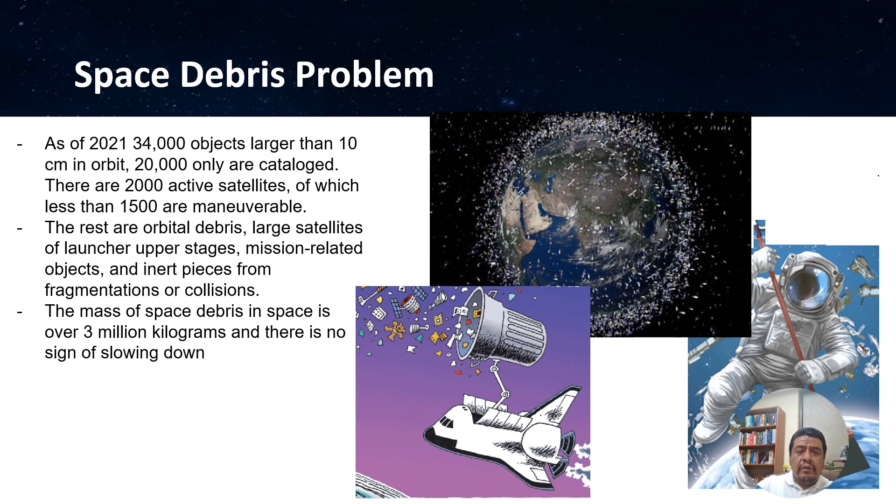This problem might produce collisions at hypervelocities. Therefore, there is a need for objects to be identified, captured, towed to a different orbit, to be reactivated or repaired if possible.

Here I introduce two examples of satellites that burned through all their fuel. After 9 years in deep space collecting data that indicated that our sky is filled with billions of hidden planets, more planets even than stars, NASA's Kepler Space Telescope ran out of fuel. The fuel was needed to continue further mission operations. Therefore, NASA decided to retire the spacecraft within its current safe orbit, away from Earth. In this case, it would have been very useful to be able to refuel the spacecraft and prolong its life. But with the current technology, it was not possible.

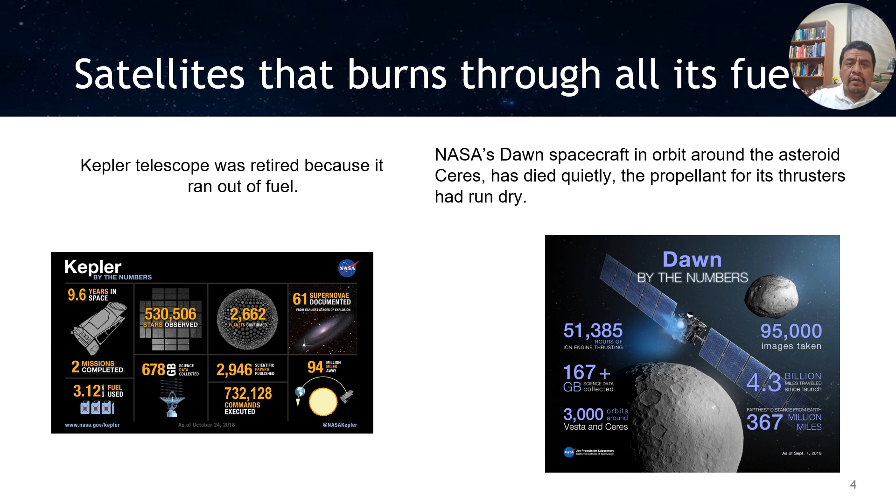Besides, after 11 years of operation in space, in 2018, NASA decided to retire the Dawn spacecraft for a similar reason. Presumably, the thrusters ran out of fuel, which prevented the spacecraft from establishing contact with Earth, as the antennas couldn't be oriented towards the Earth, and the power generating solar panels couldn't be oriented towards the sun. These are two examples that show the need for on-orbit servicing, on-orbit repair, on-orbit refueling. In order to reduce the amount of space debris, some of the malfunctioning or retired spacecraft should be captured to repair them or refuel them.

For this purpose, different techniques have been proposed. For instance, the use of mechanisms with tentacles inspired by octopus and spiders. But one of the most promising technologies includes the use of robotic arms to capture the pieces of space debris. That means a robotic arm mounted on a base satellite. In this regard, different missions have been proposed to achieve the goal of capturing a malfunctioning object in orbit, such as the Orbital Express mission and the DEOS mission.

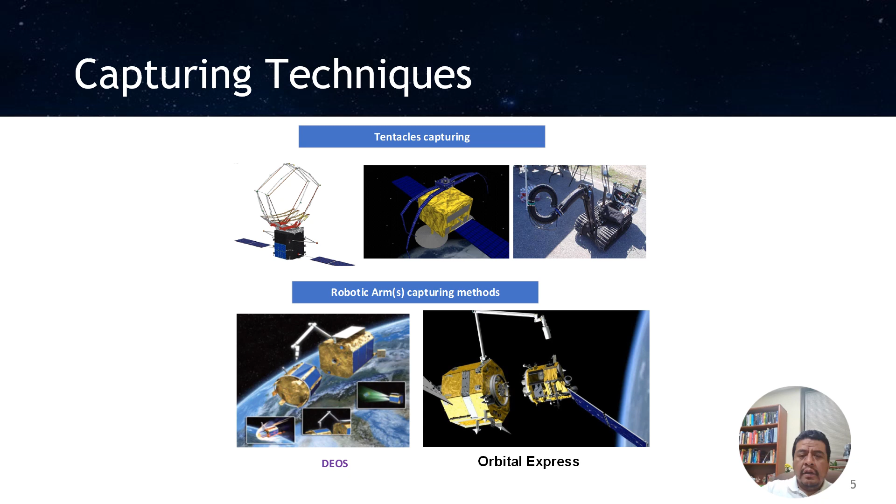The second phase is a final approaching phase where some areas of interest include soft capturing, the minimization of the disturbances on the base spacecraft due to the robotic arm motion, some safety considerations, and of course, robotic path planning and collision avoidance.

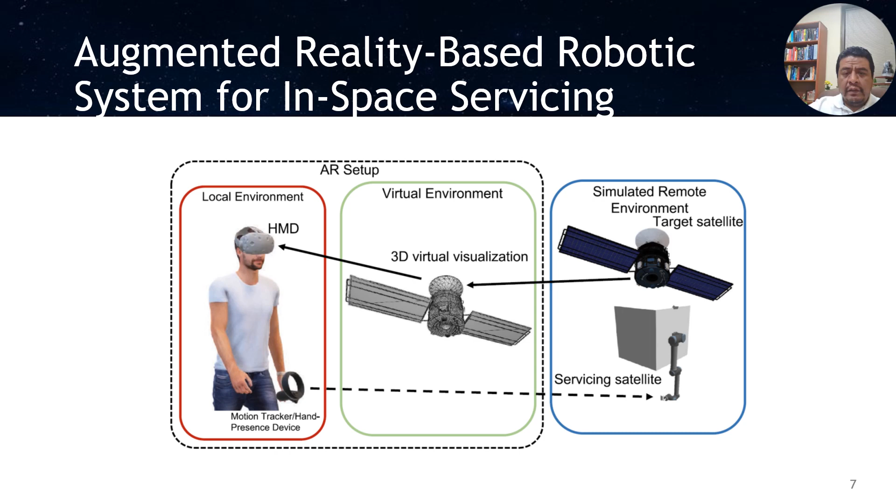This slide shows with more detail the simulated remote environment, which includes the servicing robot that features a base spacecraft and a 6 degrees of freedom robotic arm, which will perform a repair task of a solar panel.

A solar panel might be damaged during launch due to the high vibration loads or due to electric discharges in orbit, for instance. So, in this example, the robot should deposit a conductive ink to repair probably an open circuit or so.

In the augmented local environment, we have the human operator and we have the spacecraft simulated system. The human operator will use the model, the virtual model, to recreate the trajectory that the robot should follow for the repair task.

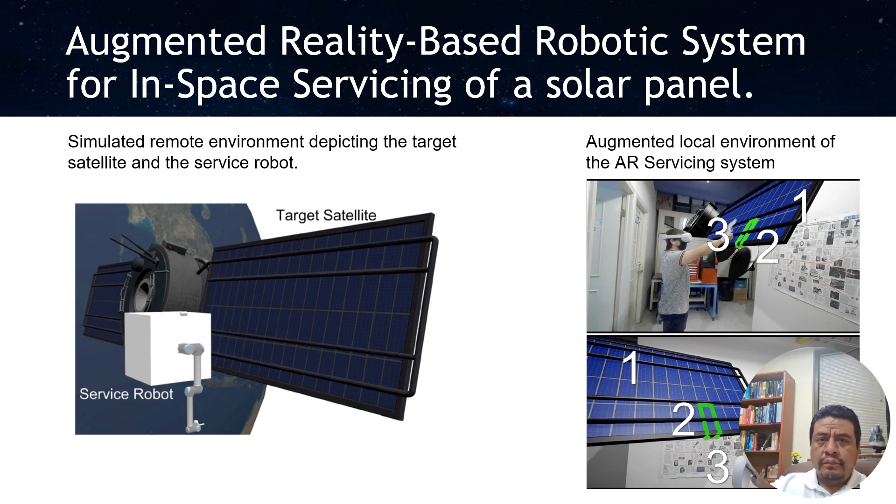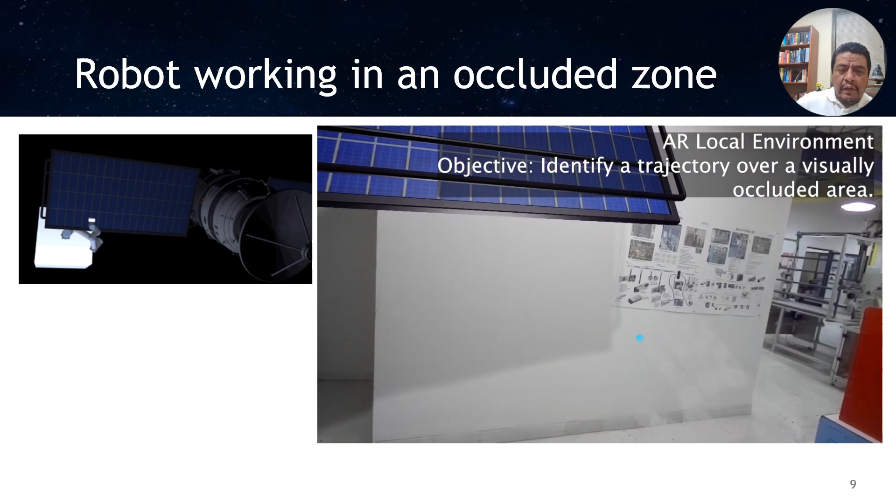As we can see here in this figure, the robot has to perform the repair task in an area that is not only difficult to reach but difficult to see. I'm gonna play the video that explains how this maneuver is performed.

In-space manufacturing and assembly also has potential to reduce space debris. For example, we can manufacture tools and components in orbit to repair and replace parts. Then we can also use space robots to install, assemble, or replace those broken components. And it will also increase the flexibility in the repair tasks.

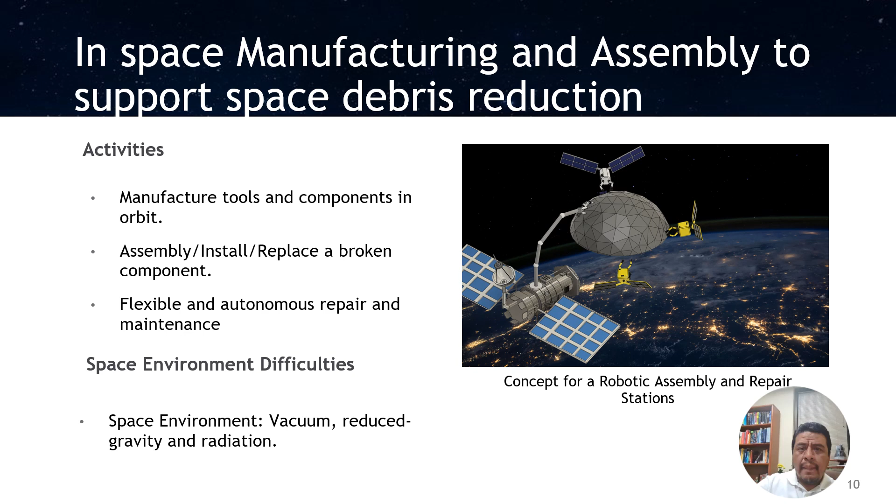A project related to in-space manufacturing and assembly we are working on is related to space welding. However, before performing the welding process, we first need to perform the joint fit-up of two components, in this case, two triangular parts as an example.

So we have a system with a 6 degrees of freedom robotic arm and a 2 degrees of freedom free-flyer small robot. They both have to coordinate to perform the joint fit-up of these two components.

The system includes a set of cameras to monitor the process and make sure that we achieve the required precision and process control. In this case, we have to make sure that the gap and mismatch of the two components are according to the requirements.

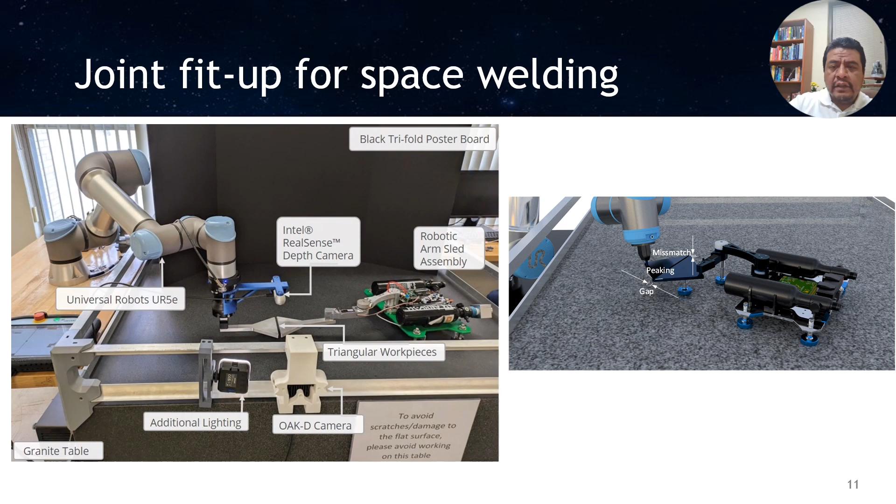Here, I'm going to show a video that illustrates how the two robots move to perform the joint fit-up of these two triangular parts, and we will be able to see also the response of the vision system to ensure process control.

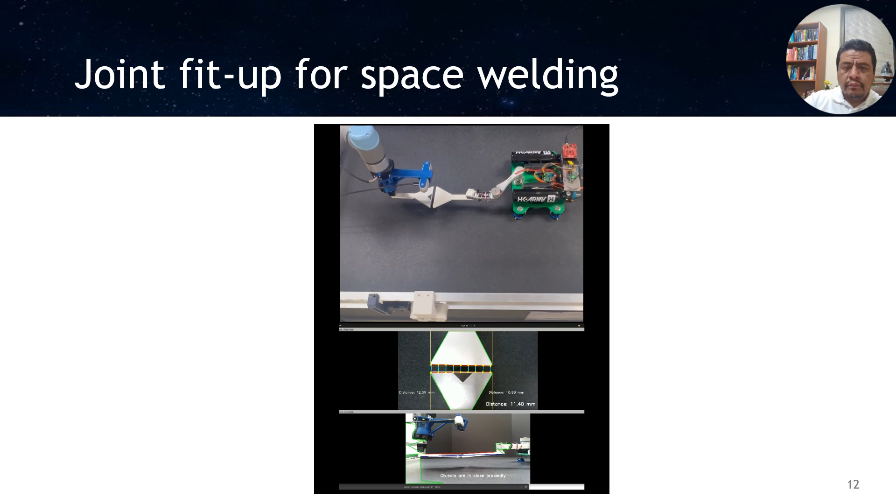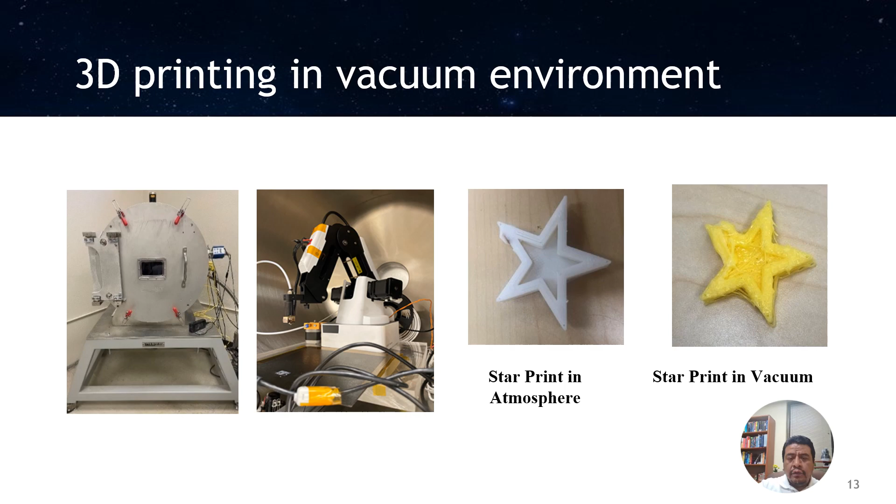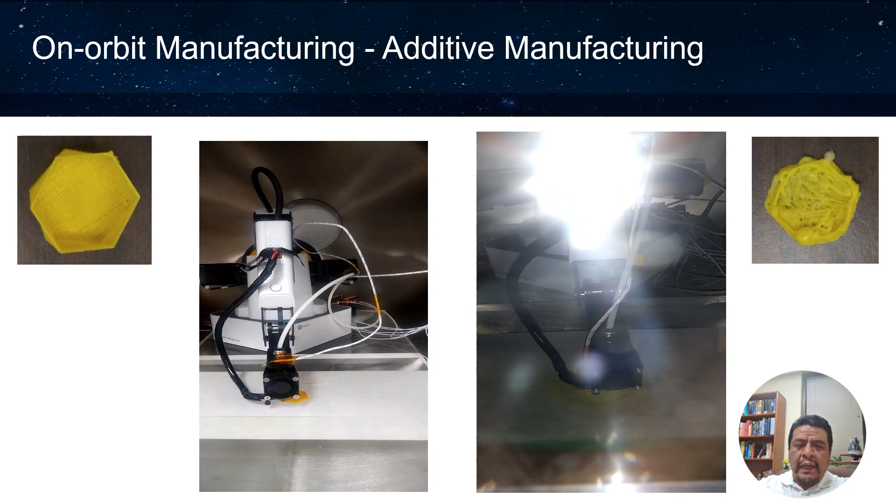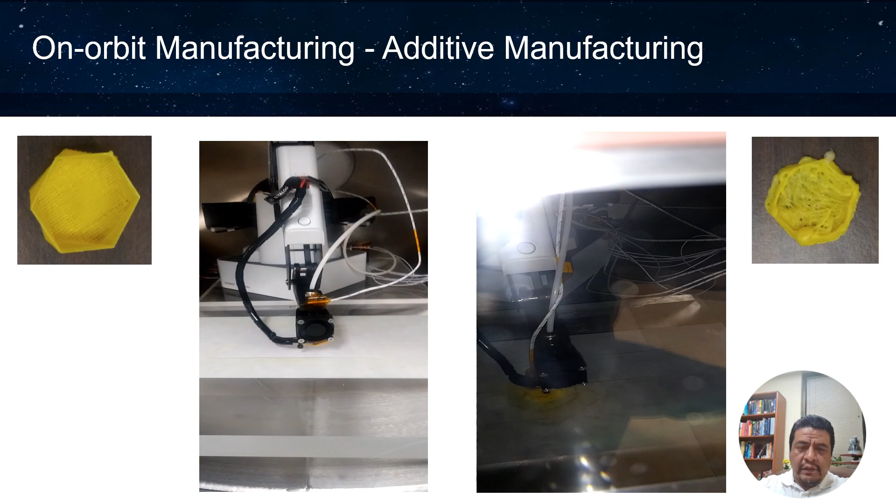Of course, the one printed in vacuum has some defects due to the lack of convection and due to the outgassing. This slide shows the video of the robots performing the 3D printing of the two same parts in regular atmosphere on the left and in vacuum on the right.

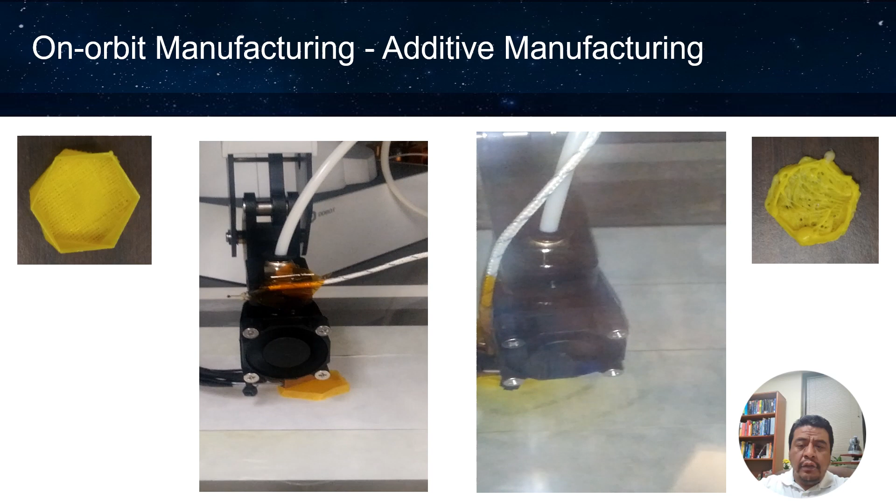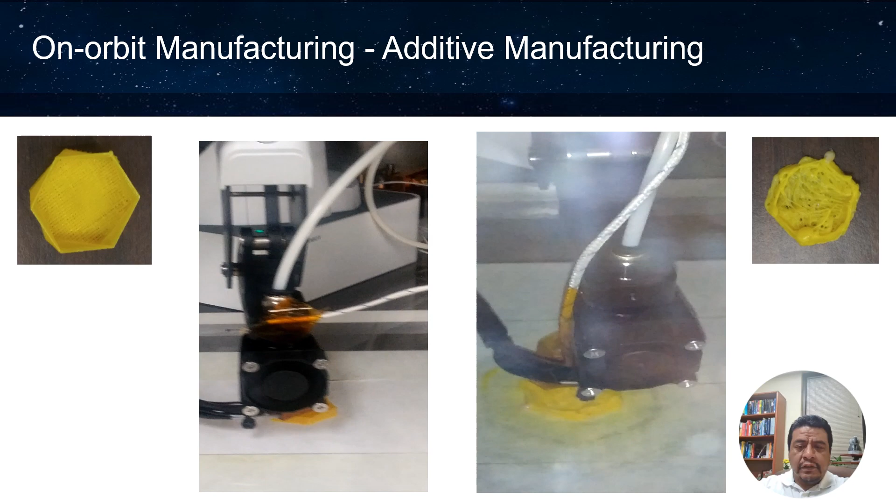As we can see, the part being printed in the vacuum environment exhibits some defects due to the lack of convection in vacuum and due to the outgassing. That's why we can observe some bubbles on the part. Therefore, new processes and new materials need to be developed to support additive manufacturing in a space environment.

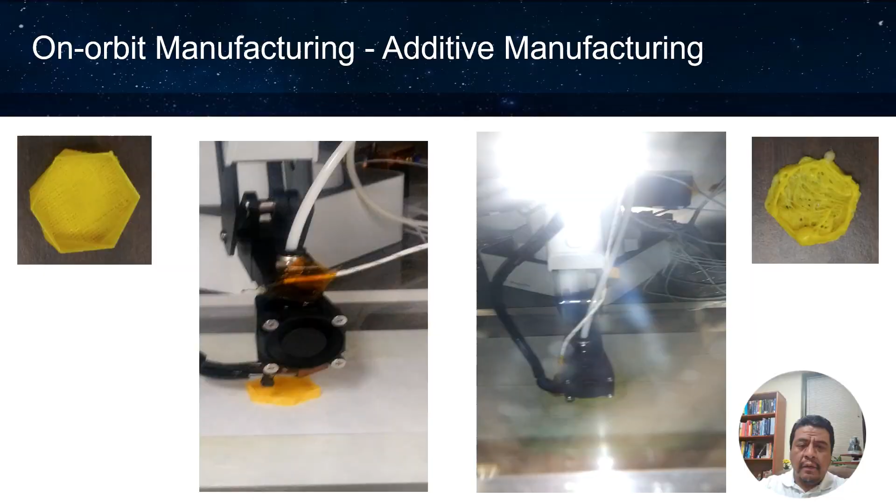This is a technology demonstration mission to further advance some algorithms that in the future will be used in other robotic missions to support ISAM activities in space, servicing, assembly, and manufacturing, including, for instance, on-orbit servicing and on-orbit assembly.